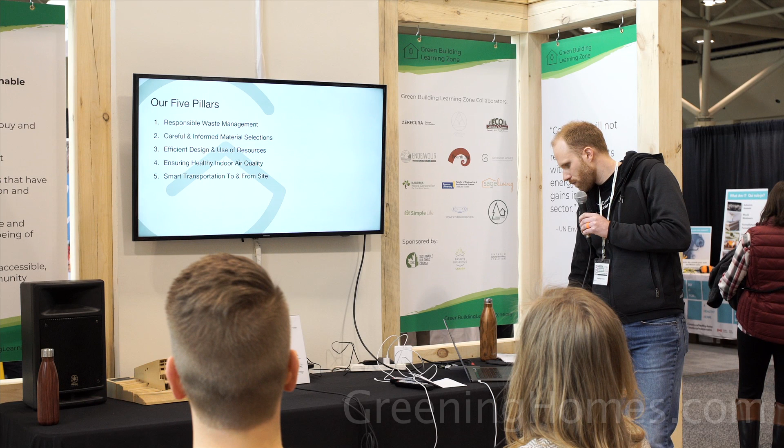So we strive to maximize these pillars on every one of our jobs, regardless of scope and size.

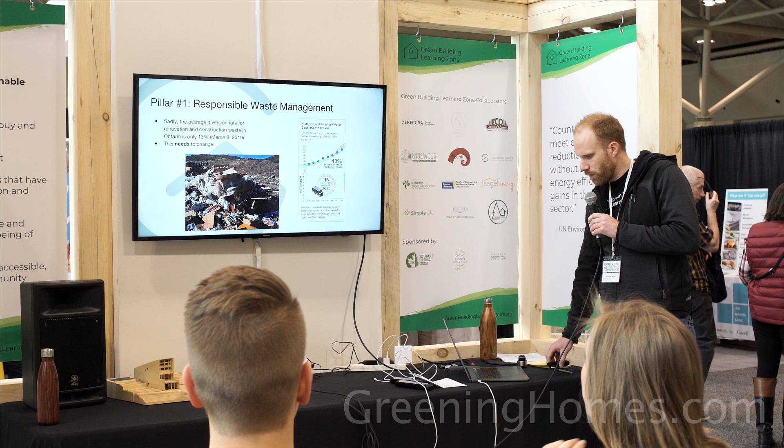So the first pillar is responsible waste management. So at the beginning of every project, we design a custom waste management plan, which ensures that all building materials that are recyclable and reusable do not end up in the landfill.

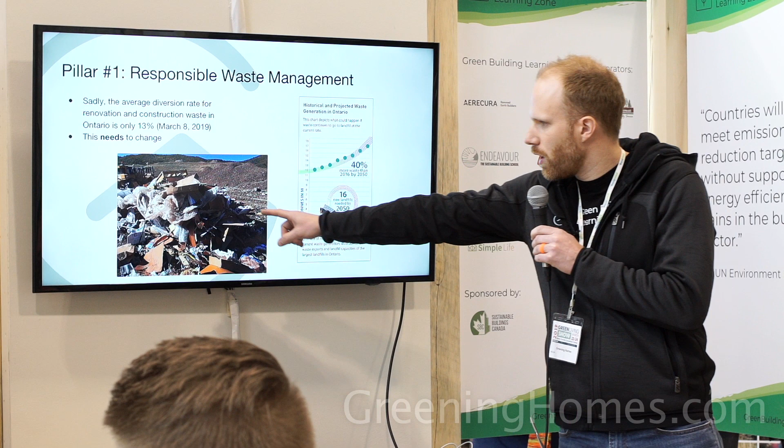So why do we do this? Well, the construction industry is immensely wasteful. This is just an example right here. You can see all the cardboard and plastic that could have been recycled, but instead is in a landfill. And as you can see, sadly, only 13% of waste is diverted in Ontario alone.

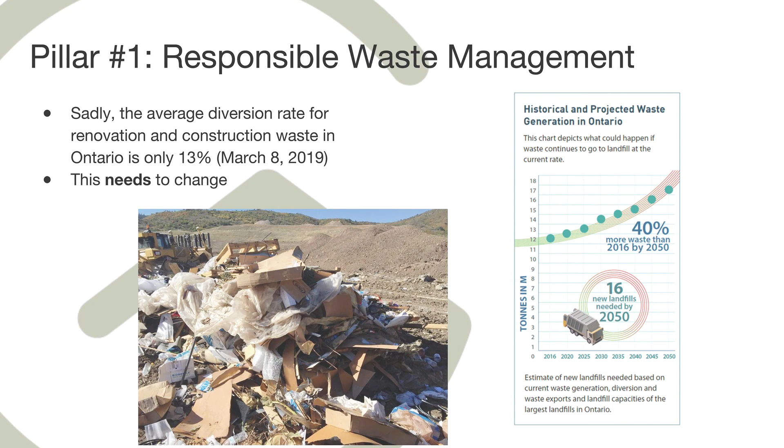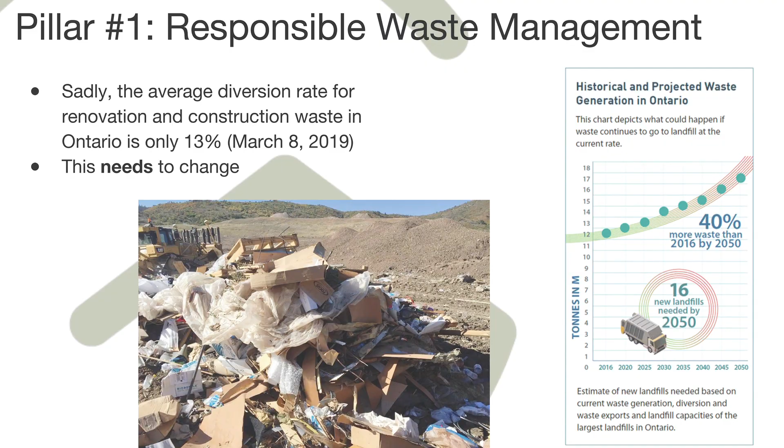Now, with this graph here, if this sort of continues along with current garbage practices, by 2050, we're going to need 16 new landfills in Ontario alone, which is a huge number.

Our second pillar is careful and informed material selections. So we believe that a healthy home is the sum of its parts, and therefore those parts should be carefully selected. So we accomplish this by making careful and informed material selections.

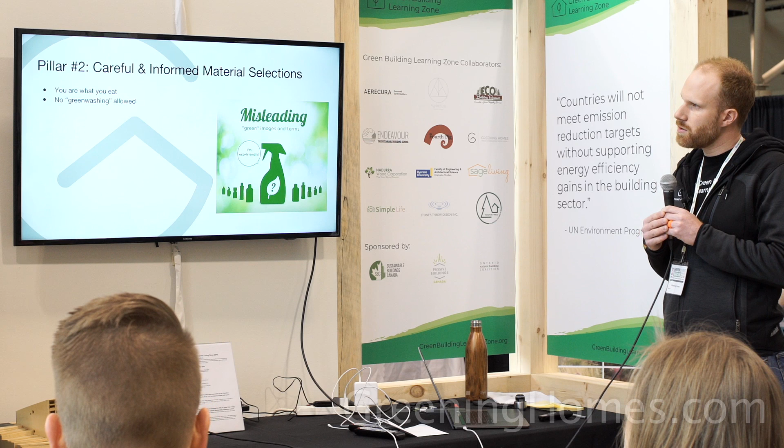That means staying actively up to date on materials that are green and the real deal. Things that are greenwashed will not end up in your home, which is quite common. Just because something says green or eco on it does not mean that it's eco or green.

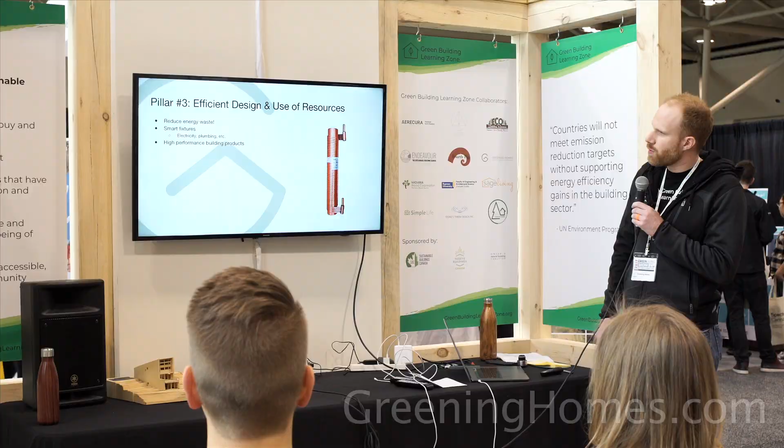Our next pillar is efficient design and use of resources. So this is all about reducing energy waste. As we all know, natural resources are finite, and so the use of these resources is very critical.

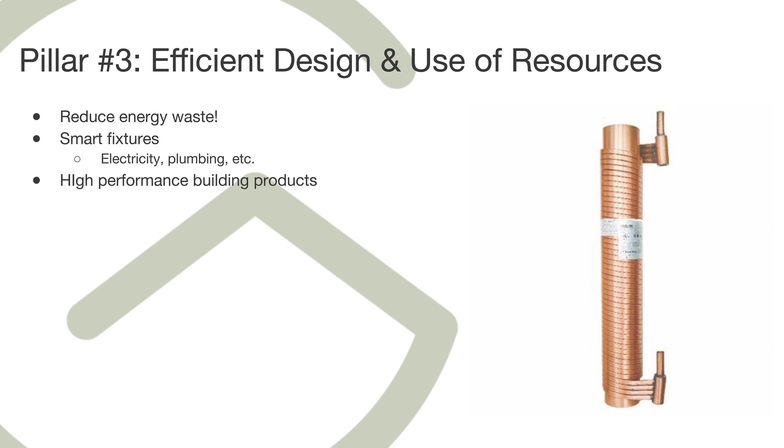And so the best way to do this is, one, we consult with experts in the field, whether it's in plumbing, window installation, HVAC. We make sure that you have the best and most efficient. We install smart fixtures wherever we can, whether it's electricity, plumbing, etc.

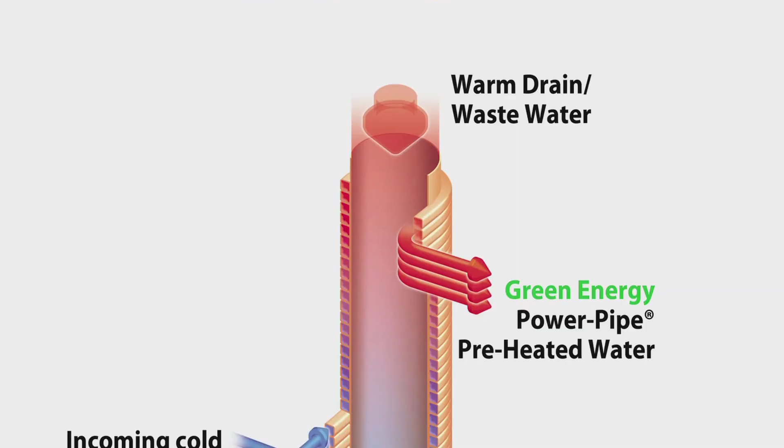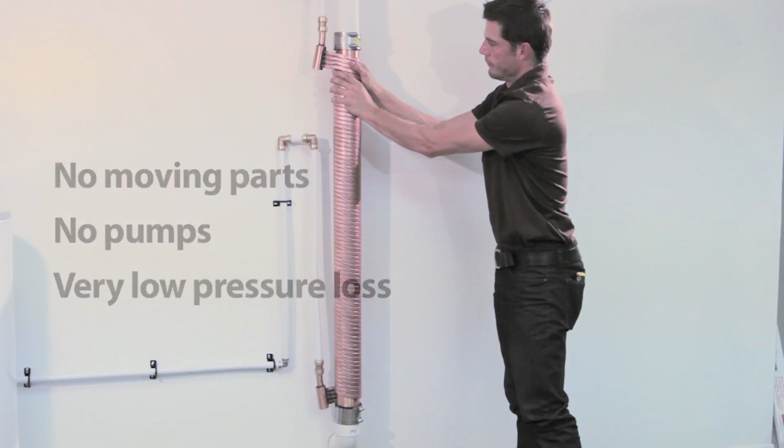An example here is a power pipe. So the main coil in the middle is wastewater coming down. It heats up the water that coils around it, which then goes to your hot water tank. So by the time that water reaches the hot water tank, it's already been heated up 25% by the wastewater. So it reduces energy use. That's just one example of what we do.

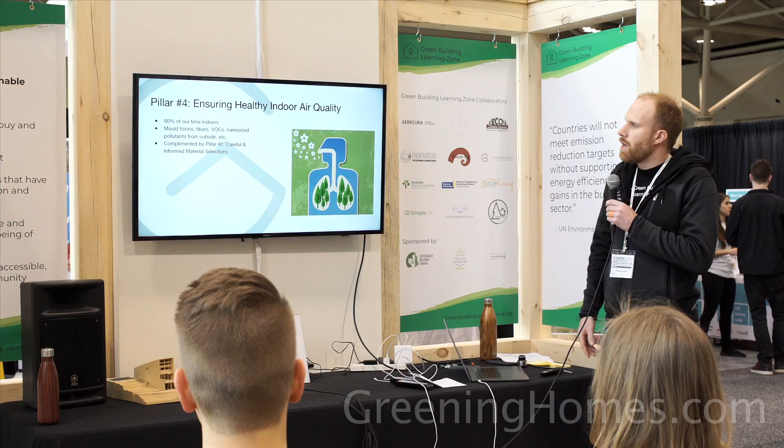Our fourth pillar is ensuring healthy indoor air quality. This is complemented by our second pillar, which is the choice of materials we use. A staggering figure here is that 90% of our time is spent indoors.

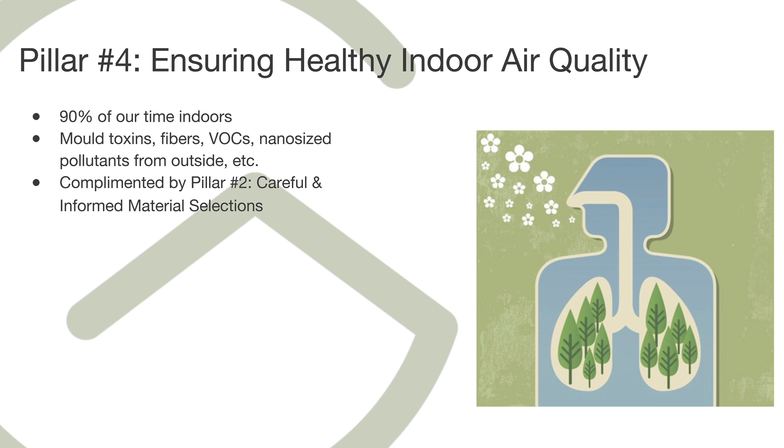This always blows me away. And the indoor environment is actually full of toxins such as mold, VOCs, and other pollutants from outside. So the building materials we use and the ventilation systems we use are critical in keeping those pollutants down.

Next, I'm going to talk about these pillars in action. I'm going to cover 2 projects that we've recently completed and show you how these pillars are implemented. So the first is a house in Leslieville.

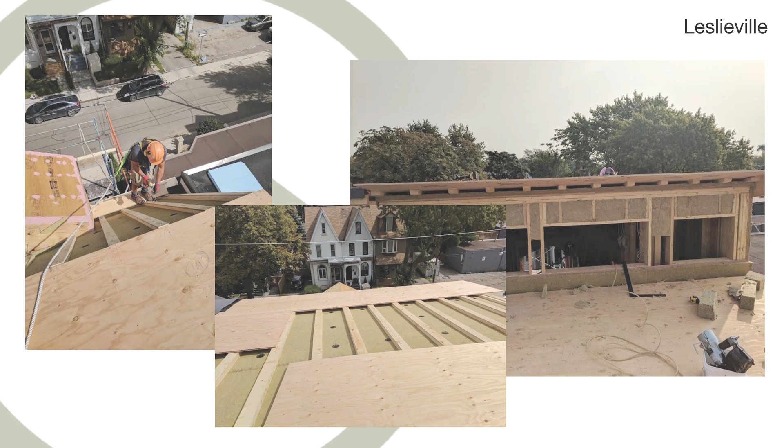So these are some of the materials we use in the house in action. The framing lumber is FSC certified. We used a rock wool insulation, which is recyclable. We use some of our zero VOC airtight liquid membrane for air tightness. And with our assembly here, which is fully vented, we reached an R value of 45. Ontario requires an R value of 31, so we surpassed it by 45%.

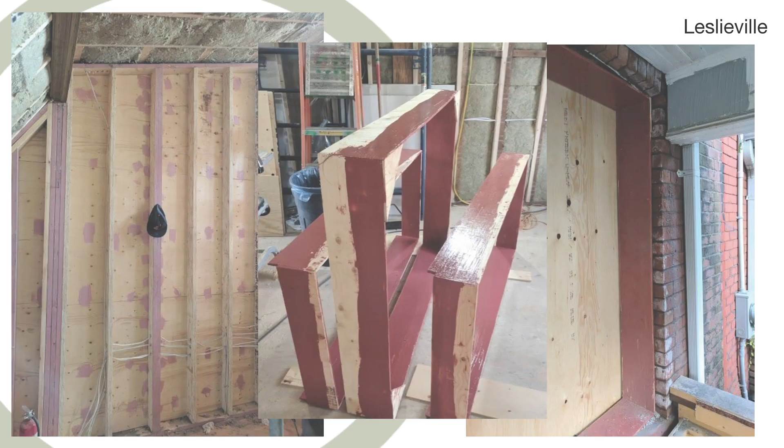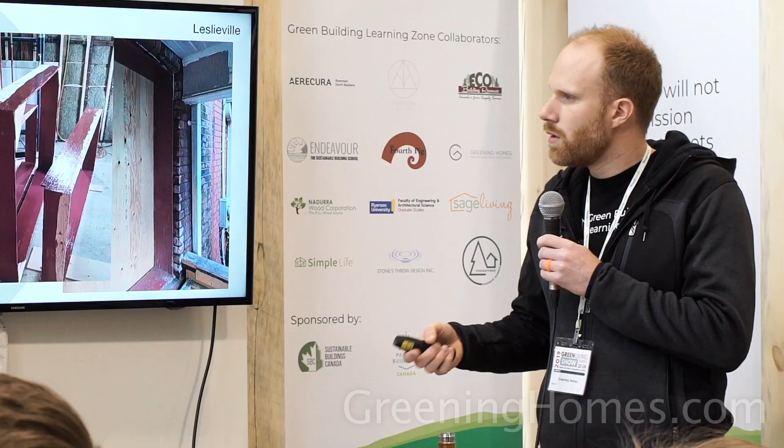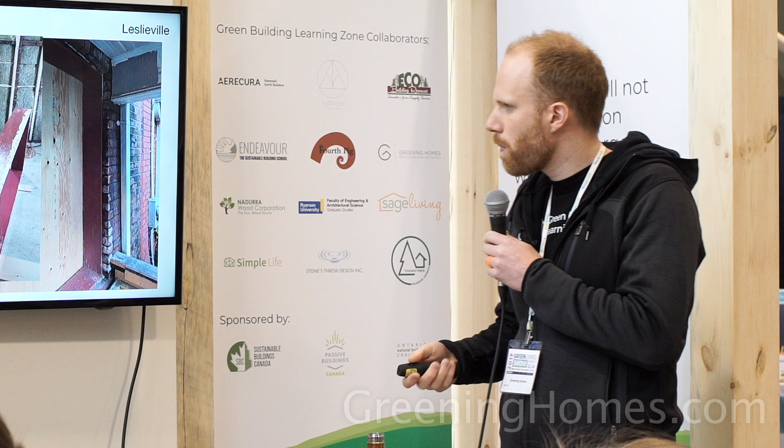Here's some more examples of our air tightness work. These are window bucks, so the window actually goes in there, and then it's tied into the rest of the house, creating an airtight seal. These pink marks are all penetrations that went through the sheathing when we were putting on the exterior insulation. They're sealed, again, making the house airtight. And here's an example of the buck in place before the window goes in. Between the buck and the masonry, we put insulation and another liquid membrane that makes it airtight.

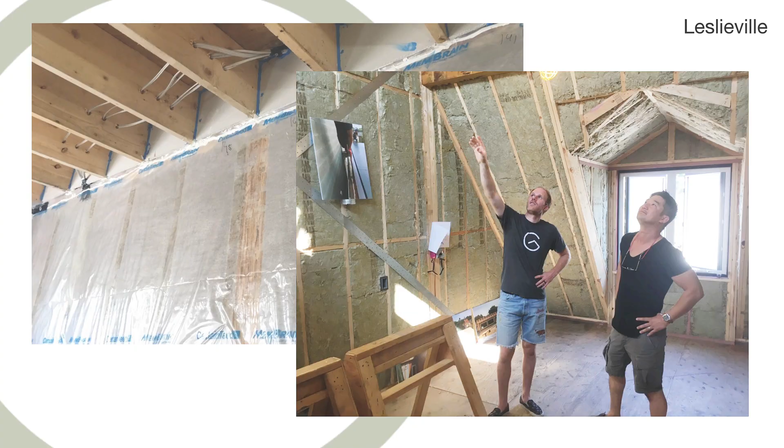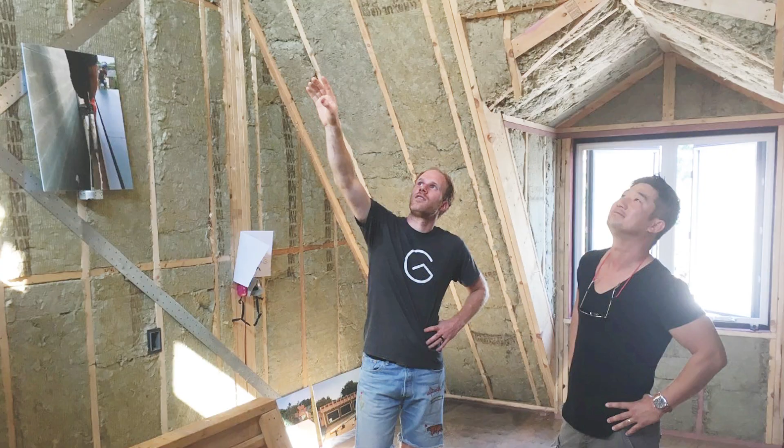On the 1st and 2nd floor for insulation, we use a dense pack cellulose insulation, which is recycled paper that's treated for fire and insects. And we use a smart vapor barrier on top of that, which actually breathes, so it allows moisture to either dry in or out, depending on the season. And on the 3rd floor, we use rock wool batt insulation. Again, the framing is all FSC certified.

And for paint and primer, we use zero VOC paint and primer. The floors are FSC certified. And the drywall is GREENGUARD, which is 99% recycled, post-consumer recycled drywall.

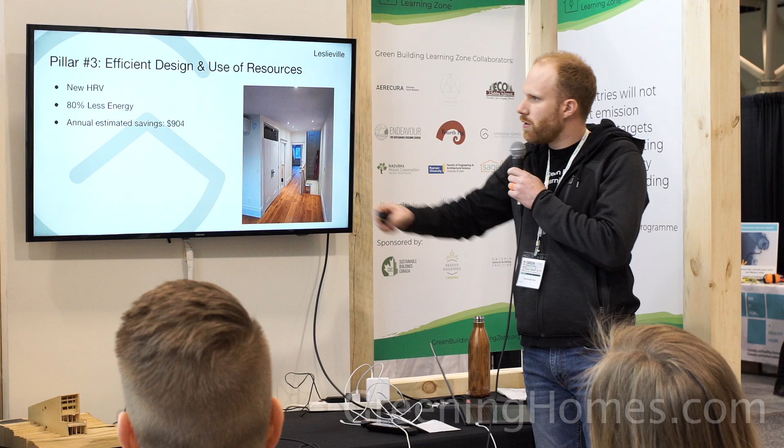So in terms of efficient design and use of resources, a new HRV went in, which was hidden behind a panel here, which supplies fresh air to the 3rd floor. It also heats the incoming air with the waste air that goes out through a membrane - it's quite an efficient system. We replaced all the pot lights on the 1st and 2nd floor with new LED high-efficiency ones, and they also ended up on the 3rd floor, which reduced the energy consumption of the lights by 80%. Based off these efforts, we estimate an annual savings of $904.

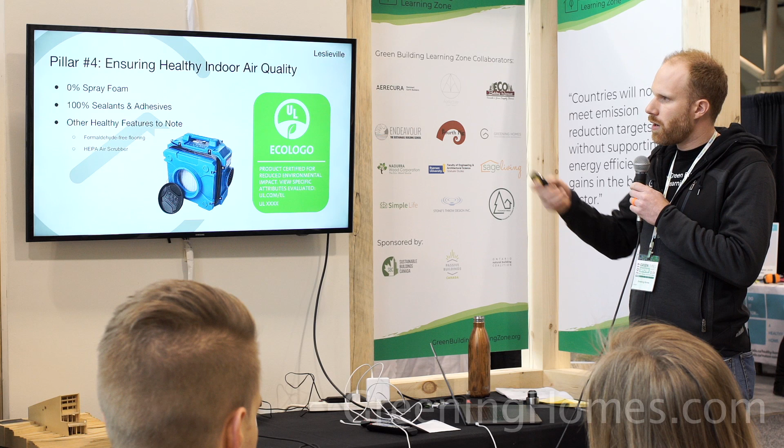In terms of healthy indoor air quality, no spray foam, absolutely no foam was used on this project. The sealants that were used were 100% EcoLogo certified, red list free, and zero VOC, so no off-gassing and friendly to the environment. Some other healthy features: the flooring was completely formaldehyde free, and throughout the duration of the project we use a HEPA air scrubber, so this not only keeps our team's lungs safe, but it also reduces the amount of pollutants that stay in the house.

Finally, pillar 5, in terms of smart transportation, our project manager for this project used an electric vehicle. Out of a team of 3, 2 of them commuted by bike or TTC. With those efforts, we reduced the number of car trips by 46 compared to another renovation of this size, which is the equivalent of 12% of CO2 savings.

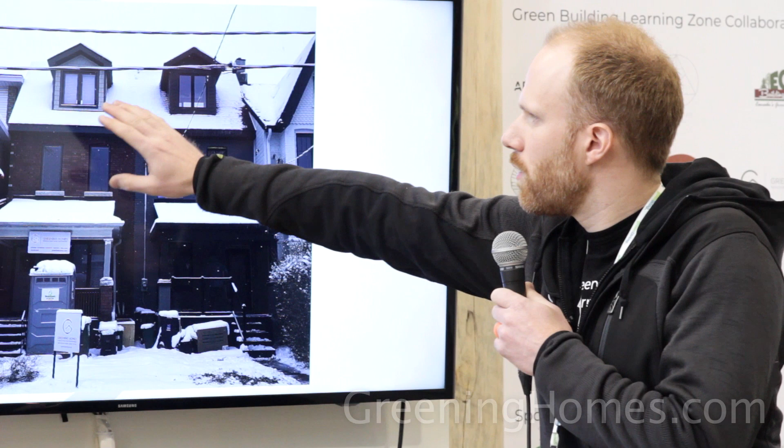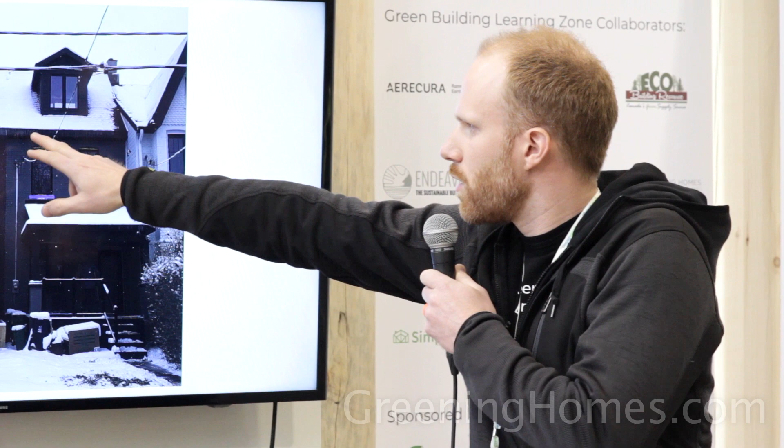This isn't really part of the pillars, but it shows that our efforts in being green can actually make the house really efficient in terms of heat loss. This is our house on the left. You can see a nice flat bed of snow and no icicles, which means no heat is getting out. But as you work your way to the right, that other renovation that happened at the exact same time as ours, you can see the icicles start to build up and the patchy snow, which means there's a ton of heat loss going on there.

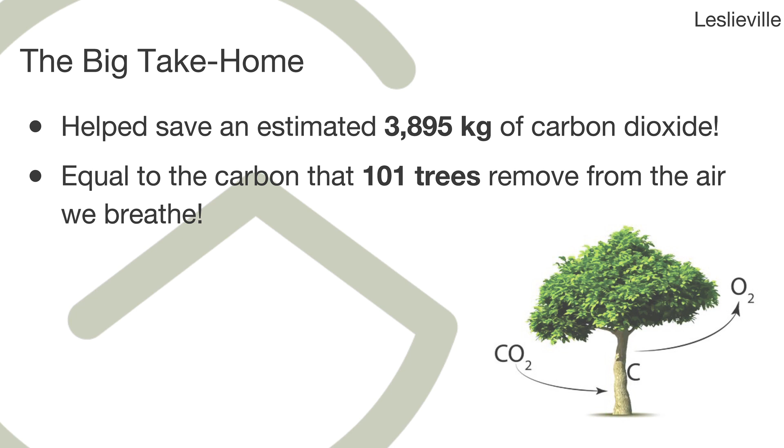So here's the big take home from this project. Based off our pillars, we saved an estimated 3,895 kilograms of carbon dioxide. That amount did not enter the atmosphere, and that's the equivalent of carbon that 101 trees would remove from the air that we breathe during their lifetime. It's quite a significant number.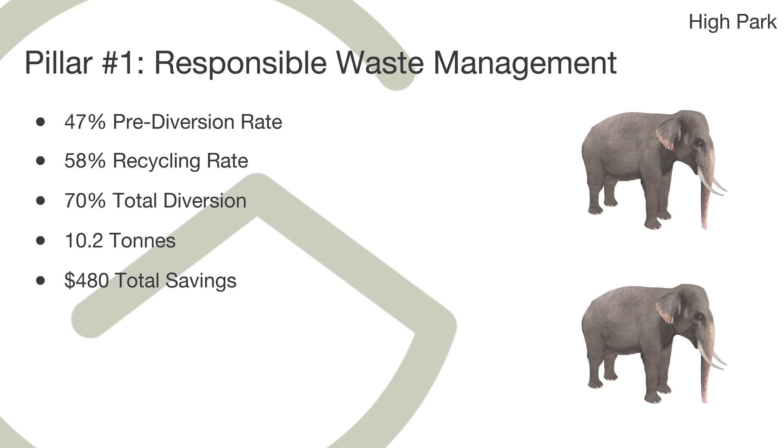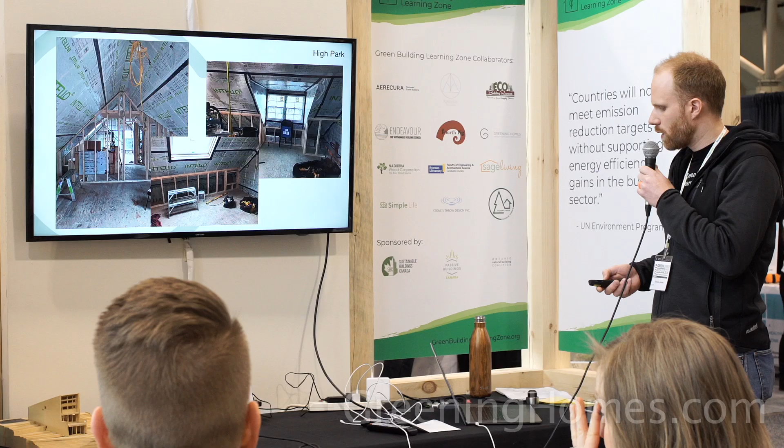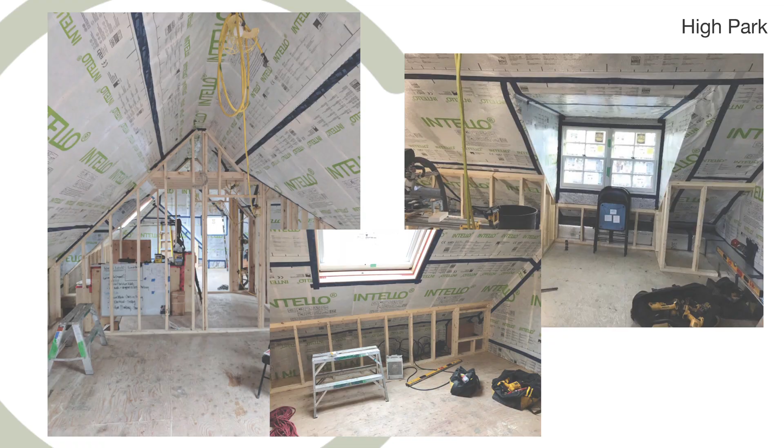These are some of the materials and standards that we used and followed. Here you can see a smart vapor retarder that we used called Intello Plus. It's 100% recyclable, so any offcuts that we didn't use elsewhere, we could recycle. The framing lumber is FSC certified, and the tape, again, is recyclable, and any caulking we used in this process was also zero VOC.

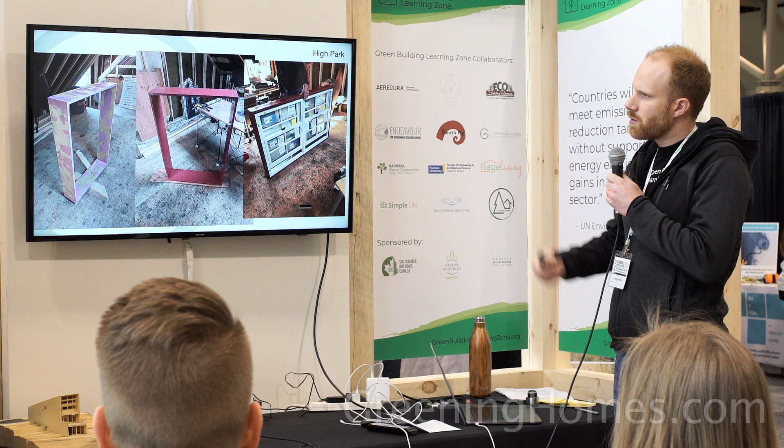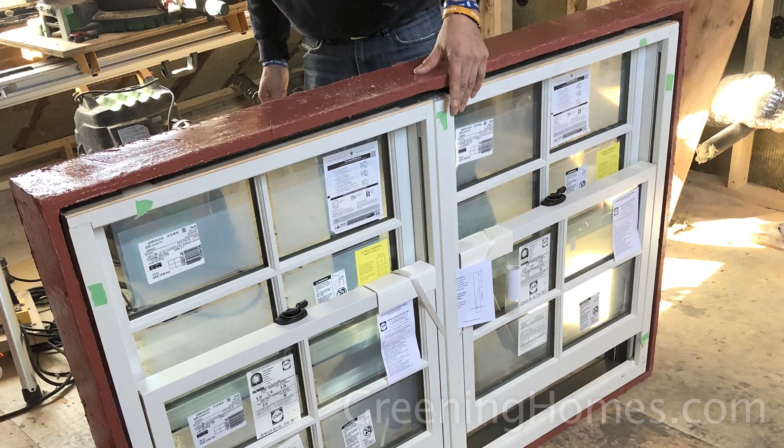Another example of our high-performance window detailing. That's the window buck before it goes in. It gets treated with a liquid membrane on the seams and any of the holes, and then it gets a complete cover in a liquid membrane flashing, which makes it watertight. The window is then inserted and surrounded with an expanding tape that makes it airtight. Then that buck goes into the opening and is tied in with the Intello you can see here, and gets taped. Airtight, watertight, energy efficient.

The flooring is FSC certified. We used some of the leftovers to make a textured bedroom nook, so there was minimal waste in terms of the flooring. With wide plank flooring you also have to glue it down, so we used a zero VOC glue. The drywall is again recycled, post-consumer recycled drywall. We use reclaimed barn boards for the faux collar ties.

And they have venting skylights here, which open and have an automatic blackout blind in them that are powered by solar.

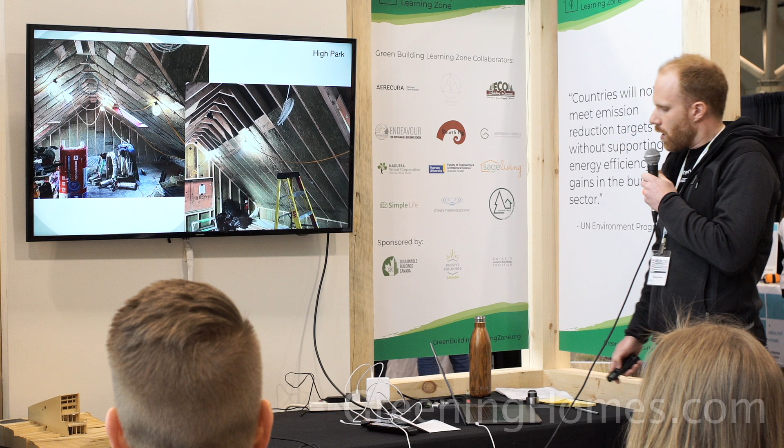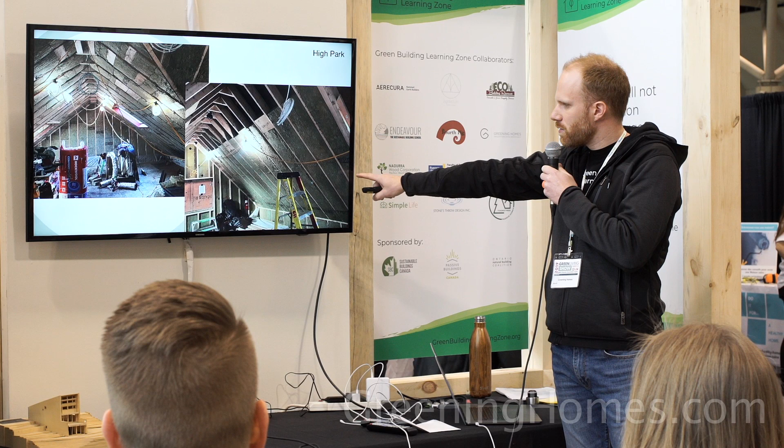In terms of framing, again, FSC certified. For insulation, we used a stone mineral wool, rock wool. On the masonry areas, we used a continuous insulation and then batt insulation, so there's no thermal bridging with the outside. In the cathedral ceilings we used batt insulation, and it's the same with the knee wall.

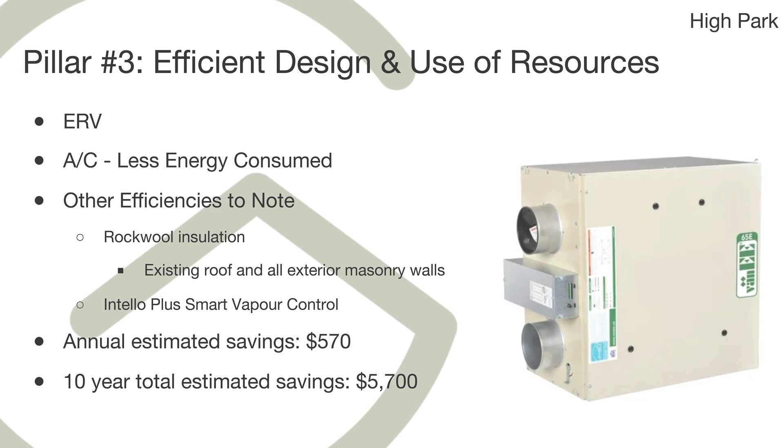Pillar 3, efficient design and use of resources. An ERV was installed. This differs from the HRV I discussed in the last project in that this one also handles moisture control. A new SpacePak high efficiency AC was installed, so way less energy is now consumed compared to the one they had before. Some other efficiencies to note are the rock wool insulation, which was put into all the existing roof and masonry walls, and the Intello Plus smart vapor control. Based off this, there's an annual estimated savings of 570.

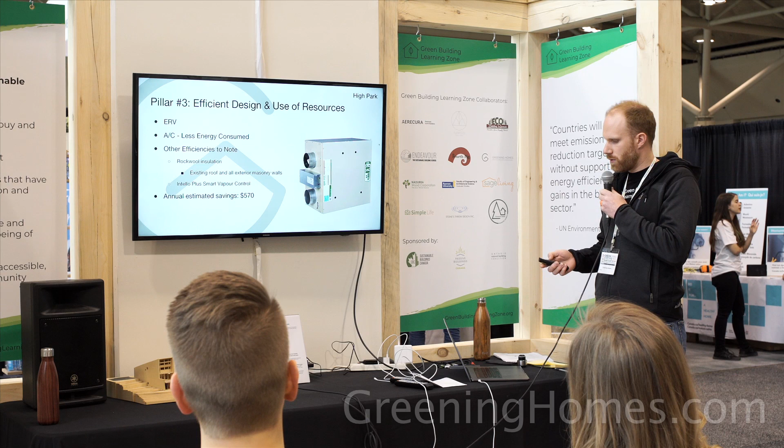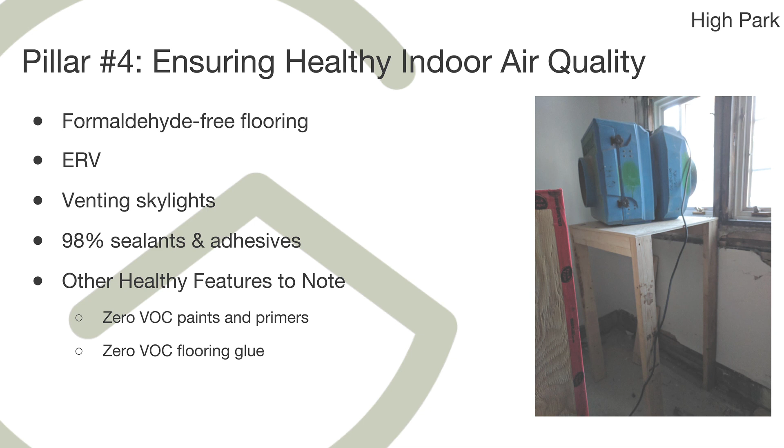For indoor air quality, we use FSC, formaldehyde-free flooring, and the glue I noted is 0 VOC. The ERV provides fresh air, and venting skylights passively flush the house through the stack effect. 98% of the sealants and adhesives we used were either EcoLogo, Red List certified, or 0 VOC. This house also used 0 VOC paints and primers.

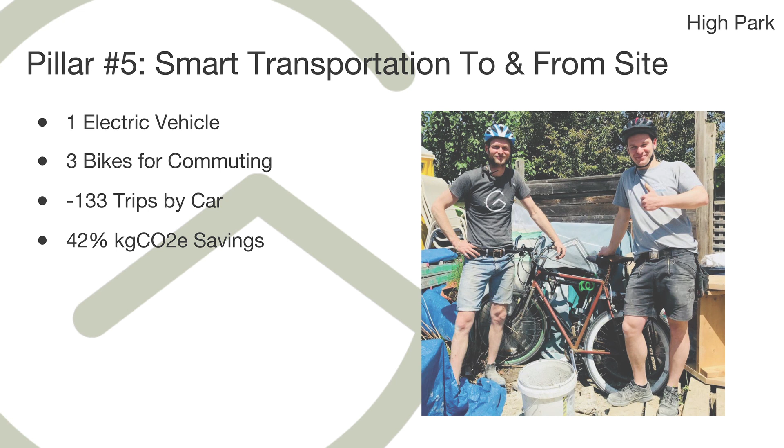In terms of smart transportation, the project manager used one electric vehicle, and out of a team of 4, 3 used bikes and or TTC. This reduced the number of car trips you'd see on a typical construction site of this size by 133, which is huge - an equivalent of 42% savings in CO2 by kilograms that did not enter our atmosphere.

So what's the big take home from this project? We saved an estimated 6,597 kilograms of carbon dioxide from going into the atmosphere, which is equivalent to 171 trees that would take to remove that from the air we breathe.

Some of the challenges we face with sticking to our pillars primarily come from subtrades who aren't part of our company but we work with. They often don't know what's recyclable, or are in the mindset that since they're working, they just throw it away quick without thinking.

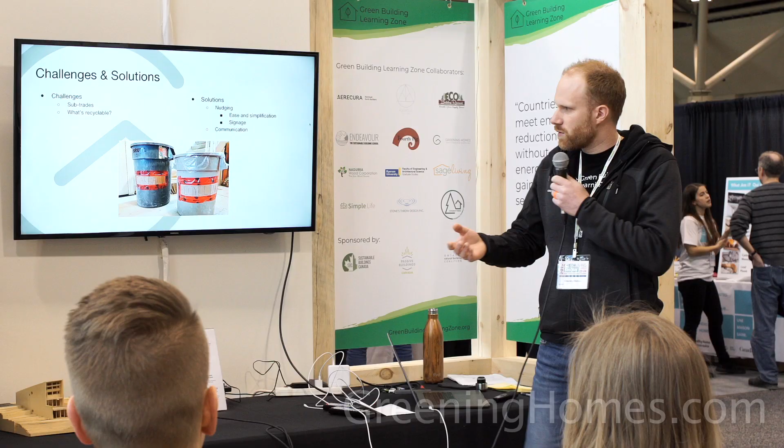I don't know if anyone's familiar with behavioral economics, but we've been trying some of it with nudging - simplification, signage, making it easy for people. One strategy is clearly labeling garbage and recycling bins. If a subtrade is working in an area, we put these bins with them. They turn around, it's easily identifiable which is which, and it's worked. The results have been pretty promising so far.

And of course, anyone that works with us, we don't use coffee cups on site. We always have thermoses. We have litterless lunches too, so that's also a big thing for us.